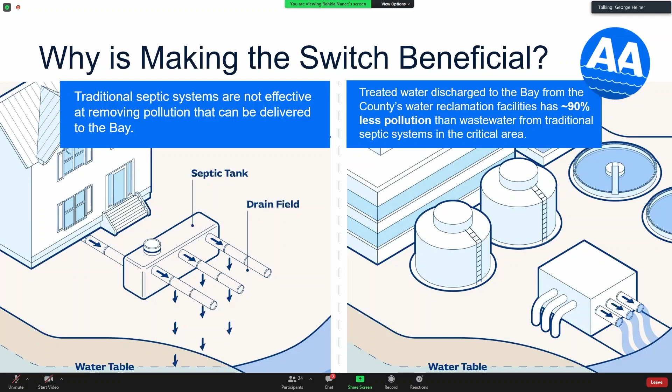So why is making the switch beneficial? The main reason there's great benefit in this is, as I mentioned before, our wastewater treatment plants are performing at a very high level, and they were able to remove about 90% more of the pollutants than a traditional conventional septic system. So we really want to take advantage of the performance we're getting out of those treatment plants, and with every connection we'll see a substantial reduction in nitrogen loads.

Can you go to the next slide? So we show some of those relative contributions on this slide. On the far right, we show what's known as the critical area, and the assumed discharge from a conventional septic system per household per year is 18 pounds per year. If you have a nitrogen reducing unit, sometimes called BATs, those can typically remove 50% of the nitrogen, which is a substantial improvement from a conventional system, about 9 pounds per year in the critical area.

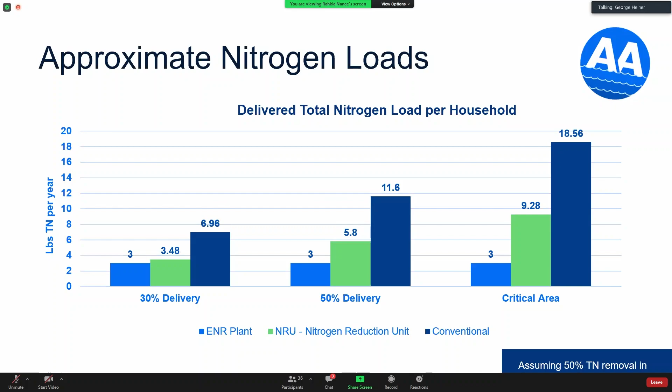But you can see our wastewater plants are producing an equivalent of what would be 3 pounds per year, and that's based on our performance requirement of 4 milligrams per liter. Our actual performance has been less than that, so the real load right now is equivalent to around 2.5 pounds per household per year. That's really why there's a water quality benefit from connecting septic systems - it's through optimizing the performance we're getting out of wastewater plants. We're taking advantage of that performance.

Can you go to the next slide? So the septic connection program was developed around the idea that the county would try to optimize and prioritize its contributions or investment in septic system connections. We'll be talking a bit more about what we're calling eligible areas, which are really the focus of the program. On this diagram, the blue areas are pretty much adjacent to the waterways. The green on this diagram is the county's sewer service areas in aggregate, and the blue areas are what we're focusing on as part of the septic sewer connection program.

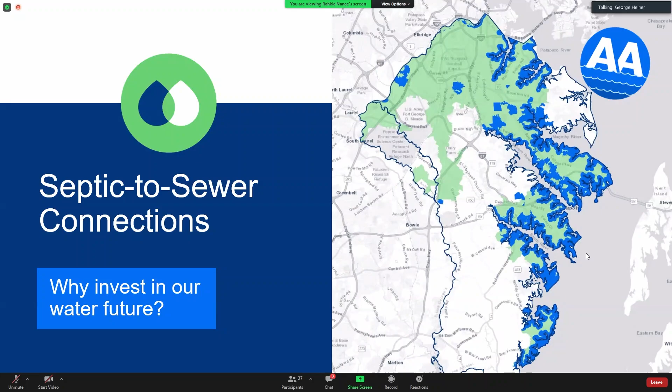Can you go to the next slide? So overall, we have a need we want to address, which is to protect our waterways and improve the environmental, public health, and water quality. We've developed this new process, which we'll talk about in more detail, where neighborhoods show interest. We're going to try to communicate to everybody what the program is, learn about how it's funded, and then neighborhoods, if interested, would move eventually to the petition process and make the conversion.

Overall, our goal is to try to connect 6,000 septic systems over the next 30 years, so that's about 200 homes a year. The county currently has over 40,000 septic systems throughout the county, so while we're trying to make a significant impact in making connections, it's certainly not the majority of systems that we're trying to connect.

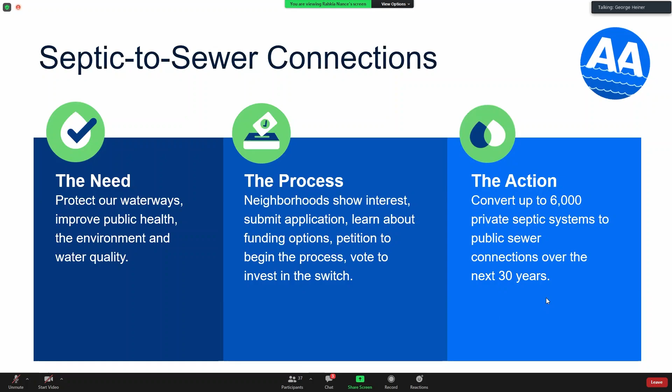Go to the next slide. So a little bit more background on the program. If you've heard of the Chesapeake Bay Total Maximum Daily Load Requirement, known as the TMDL, the earlier versions looked at nitrogen load reductions by sector, and in the septic sector, the county's goal was identified as a reduction of almost 50% in the septic sector load.

So that caused us to really start looking at how we would connect up to 20,000 septic systems. We did a lot of initial concept planning years ago, with the idea of how we would even identify feasible locations. The next step was that DPW convened a septic task force, made up of different elements like environmental interests, business community interest, and community representatives. We presented the different challenges with this 20,000 septic system connection program, and tried to pull from the task force ideas on policies, prioritization criteria, subsidies, and how we might modify the existing petition process in the county code to get more people to connect to public sewer.

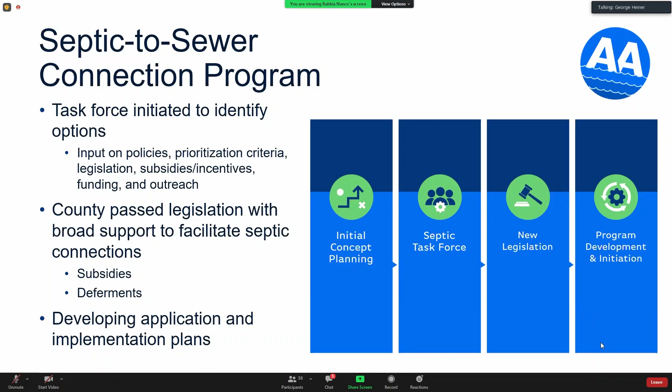Let's go to the next slide. So what makes an area an eligible area? I mentioned that eligible areas were given priority in the program. They're actually the areas defined in the code as being eligible for the subsidies and those partial deferments. An eligible area has a couple key features, or can have one of a couple key features.

One is that you're in the critical area. Another is that you're in what's known as an on-site wastewater management problem area. Another would be that you're in what's called the septic sewer connection area, which really means you're in an area that we had laid out several years ago when we were originally trying to identify 20,000 septic system connections. Or you're part of a project that includes those areas. So even if your particular property is not in an eligible area, if you're part of a project area that includes an eligible area, you become eligible through that.

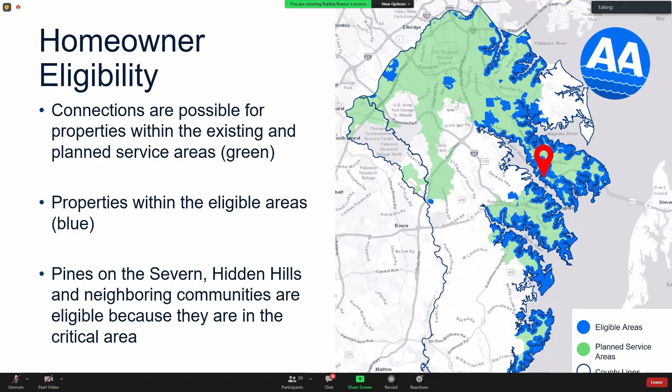In this particular instance, this community area, there are areas, I think, on the western side that are in the critical area, and that would be the connection to being eligible. Why don't we go to the next slide?

The idea when we were doing these was we looked at them not really with any overlay of what was the neighborhood definition at all. We really looked at the topography and some other basic layout criteria and tried to figure out where we might be able to make these connections.

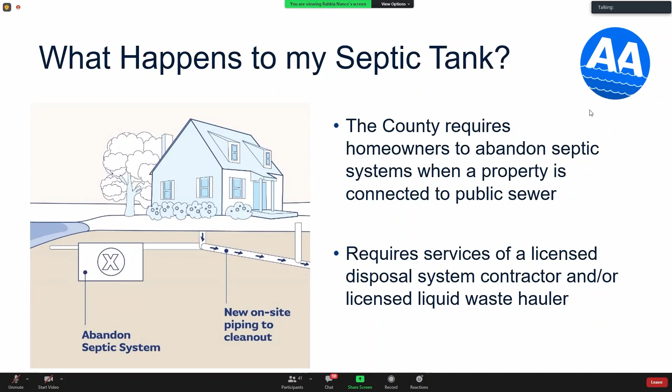Other things that impact project costs: property sizes—larger properties mean more distance between sewers and higher cost. The depth of the sewers, and the number of grinder pumps—some areas will be topographically challenged and not able to flow by gravity, so those homes may require an individual grinder pump that the county would own and maintain, but those are more expensive to put in.

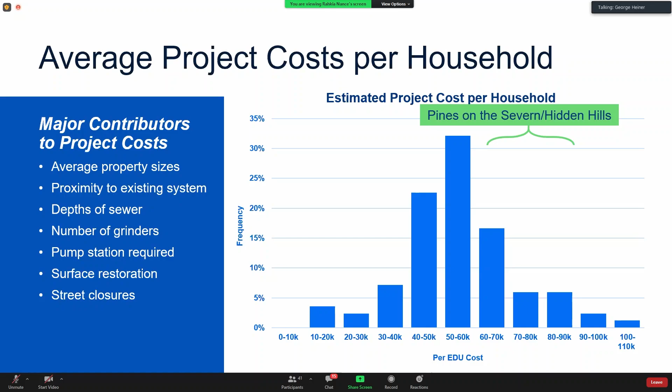As Brian mentioned, we have this data from the health department, but we did not cross-reference it and analyze the individual properties, so I can't say we've reviewed it in that detail. But the circumstances you're describing are probably where this 10 to 15% of people had to pay between $14,000 and $18,000—likely situations where the house is far away and downhill from the road, with the septic tank at the back, requiring a long run to the street, possible driveway restoration, or a pump going further up. So yeah, I think that's possible.

A couple points on that as well: it really depends on where you are as far as when a grinder pump would be required. It depends on where your sewer comes out of your house compared to what we can do topographically in the road for sewer installation. Some sewers could be relatively deep in the street and still take flow by gravity from backyards—it just depends. If the street is at a higher elevation than your house, you may have to install a grinder pump, but it depends on the situation.

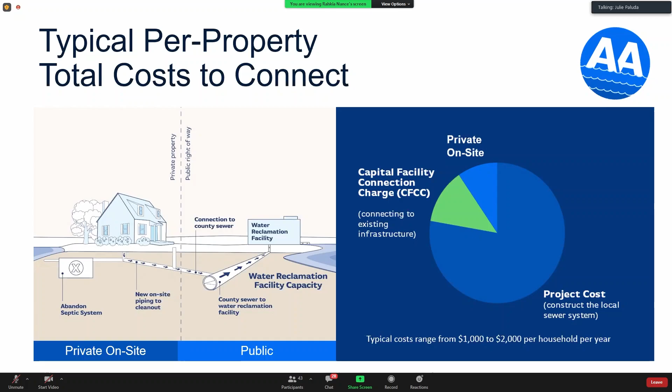Okay, these are great questions, so we appreciate everybody. Let me see, we left off at the application process, is that right? Yes. Okay, so George, now we're going to talk.

Oh George, yes, I'm sorry to interrupt. Just to clarify, does it end up being 4 equal installments? The annual installments are 4 equal installments. Oh okay, that might have been the question, I might have misunderstood it. Yes, so for each year it's the same amount, and then within that year it's split into 4 equal installments. Well, yes, I mean overall it's 40 equal installments total.

Okay, so we're going to talk a little bit about the overall process, to explain how it works. As we mentioned at the beginning, this is an information meeting for the community. This is not a vote on anything, and it's not a binding meeting of any sort. It's really the beginning of the process. As Rahkia noted, we received interest from different people in the community. The legislation enabling this program is new, and the program has recently been developed, so we're trying to let people know about it. We've been doing meetings throughout the county since midsummer, talking to different communities about the program.

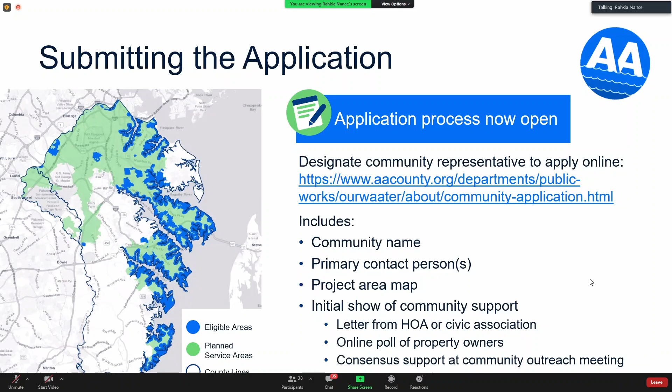This is the end of our slides, but we are happy to remain on and answer more of the questions popping up in the chat here. So I'll go ahead and address these.

The first one is: what is the county's construction throughput capacity for conversion? The goal is converting 200 septic systems a year, and the financial modeling the county did was based on 200 systems per year. Obviously, an area as large as this exceeds those numbers. That doesn't mean the county wouldn't do a project like this—it would just take longer to spread those costs over a larger period. So the assumed capacity is 200 per year. That doesn't limit the size of the project or mean that if there were 250 homes or 150 homes, those projects would be looked on disfavorably.